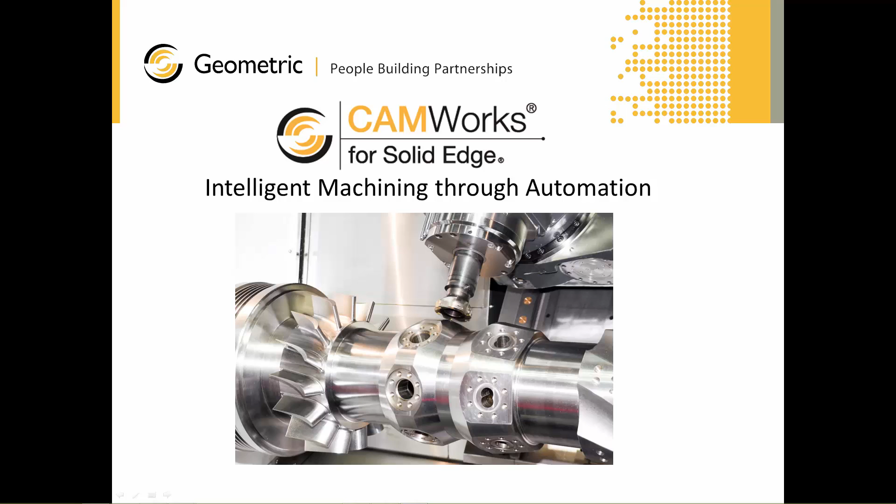We're here to talk about CamWorks for Solid Edge, so let's go ahead and get started. Geometric is the company behind CamWorks for Solid Edge. Geometric is a global company with offices all over the world. And in addition to CamWorks, we also market a number of other software products, including NestingWorks, DFM Pro, Glovius, and others. And in addition to the software products that we market, we're also one of the world's leading providers of software development and engineering services, as well as manufacturing engineering and automation services.

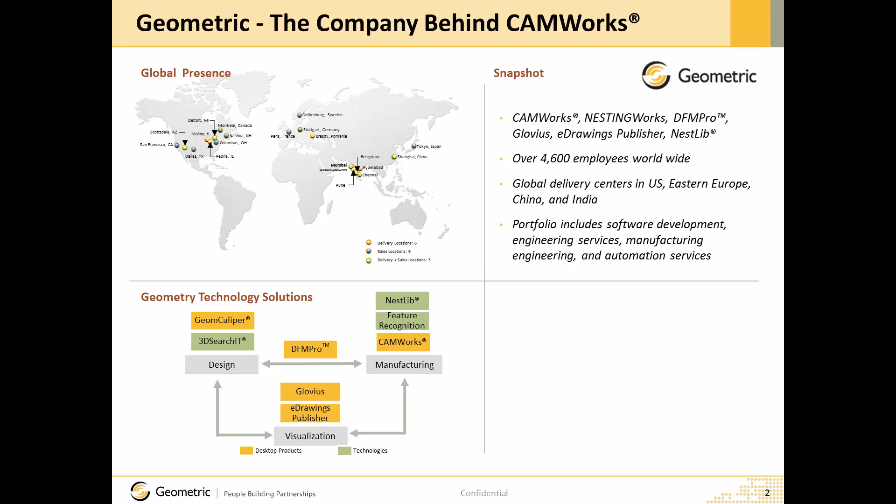CamWorks is part of the Geometric Technology Solutions, and in this diagram on the left you can see the software products that we market for design. In the center are the software products for visualization, and on the right are the software products for manufacturing, including the CamWorks product.

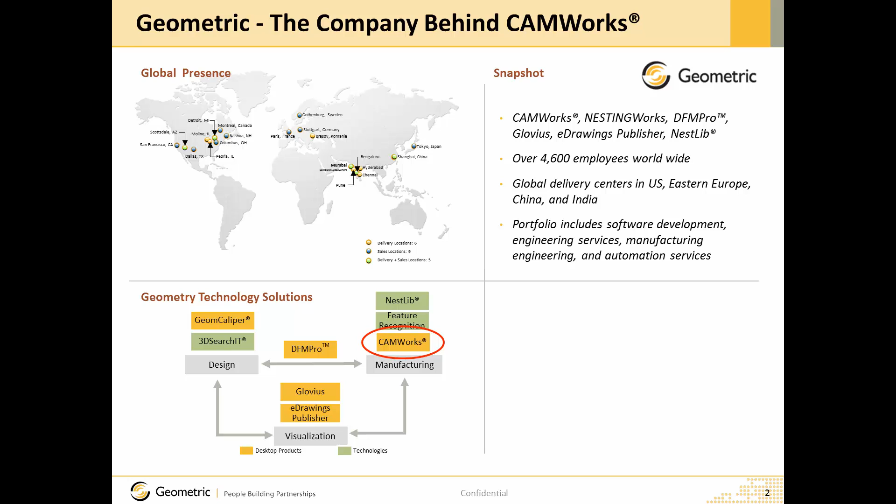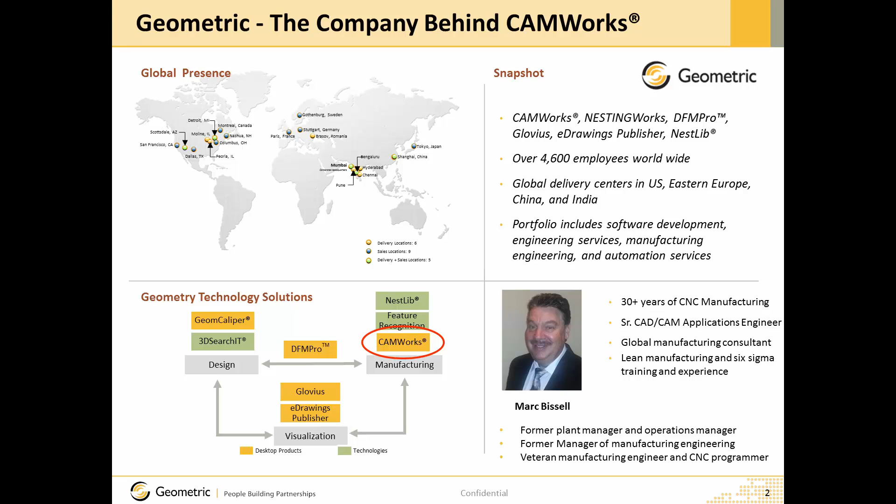So moving on, let's talk about why CamWorks. CamWorks for Solid Edge can help you reduce your programming time by up to 90%. The design and manufacturing models become one and the same, and we can help you to capture and reuse your best practices.

We can also help you cut your setup times in half. CamWorks Virtual Machine allows you to virtually prove out your CNC programs. It's a true G-code machine simulator with full collision detection, and it helps you avoid collisions and increase your program integrity.

CamWorks can also help you achieve faster cycle times and double your machine capacity. You can reduce cycle times by as much as 80% and increase your tool life by as much as 500%.

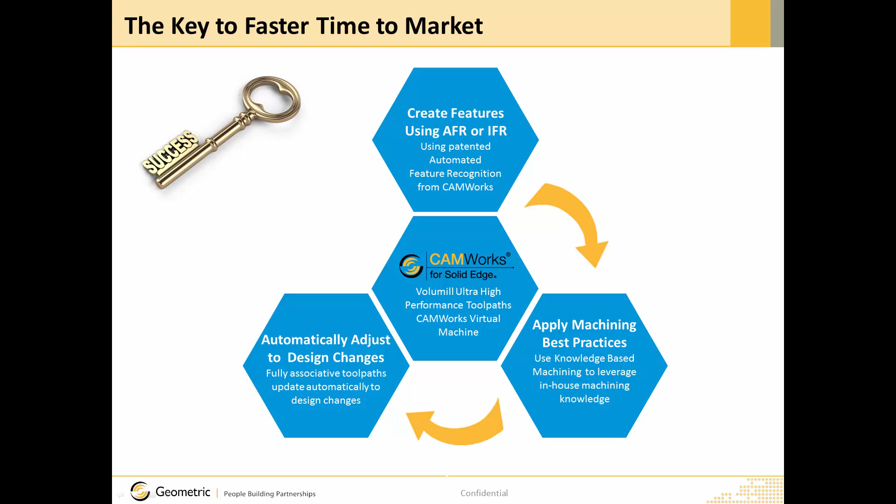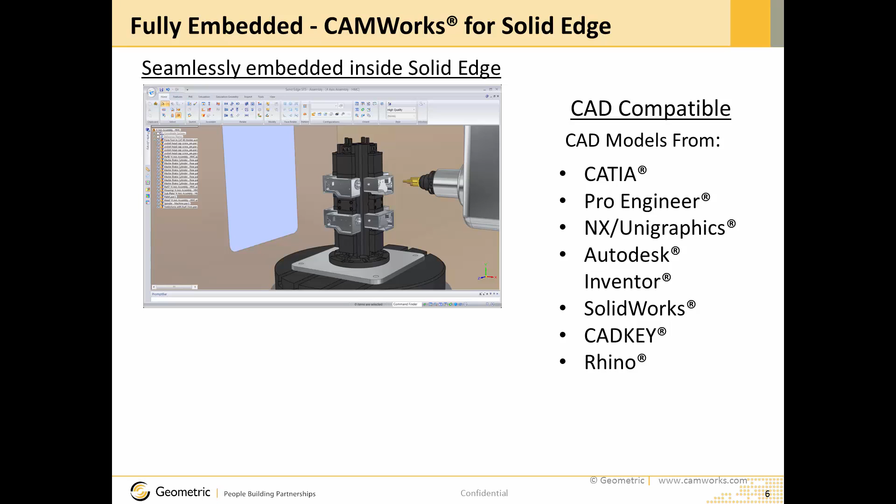CamWorks for Solid Edge is seamlessly embedded inside Solid Edge, so you never have to leave the familiar Solid Edge environment. CamWorks for Solid Edge works exactly the same with imported models as it does with native Solid Edge files, so it's also compatible with CAD files from a variety of other CAD systems. And it also supports industry standards like STEP, ACIS, Parasolids, IGES, and others.

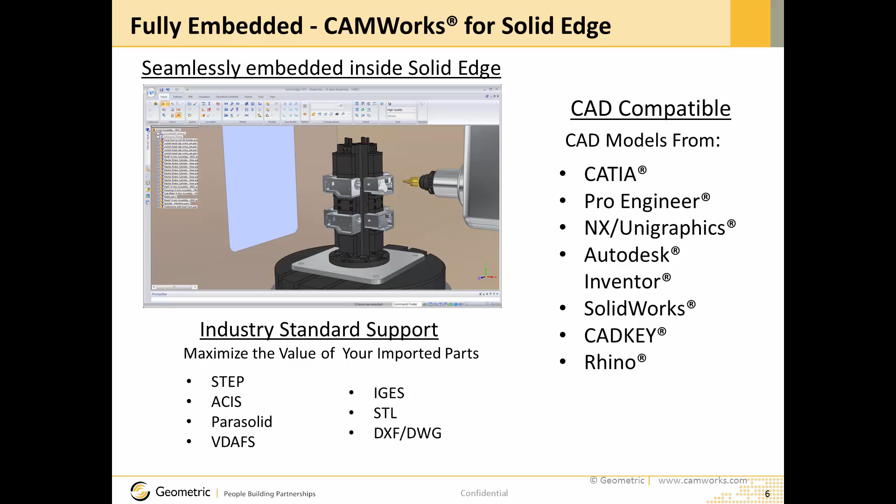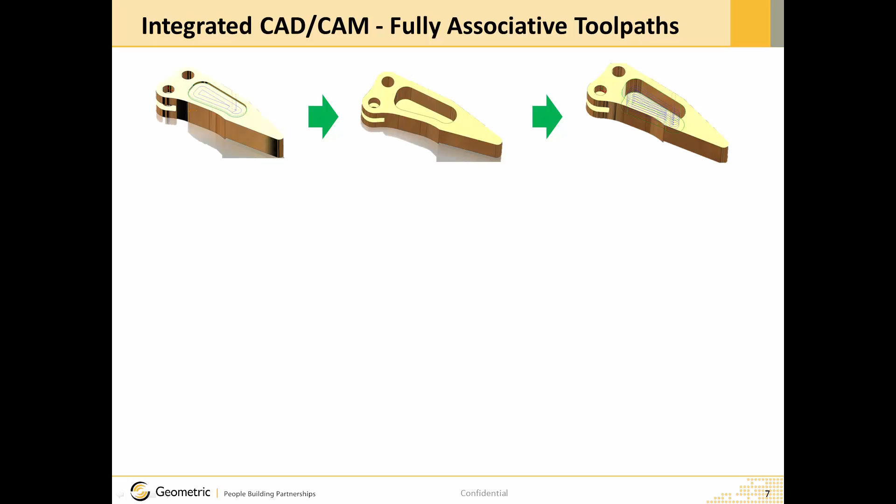CamWorks for Solid Edge is a fully integrated CAM system, and that's what makes it different than standalone CAM systems. The CAD and CAM model become one and the same, and all of the CAM data is stored directly inside the CAD file, in the case of Solid Edge, the .par or .asm files. There's no extra files to maintain, and no issue with geometry or translation errors.

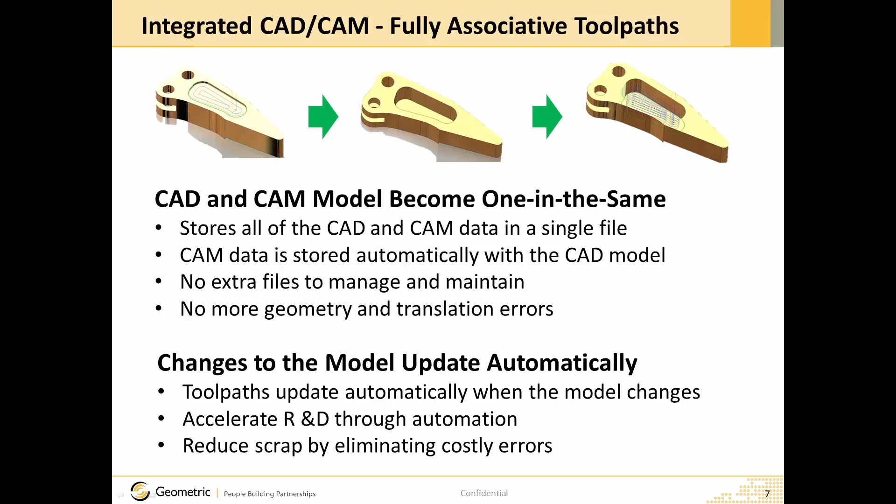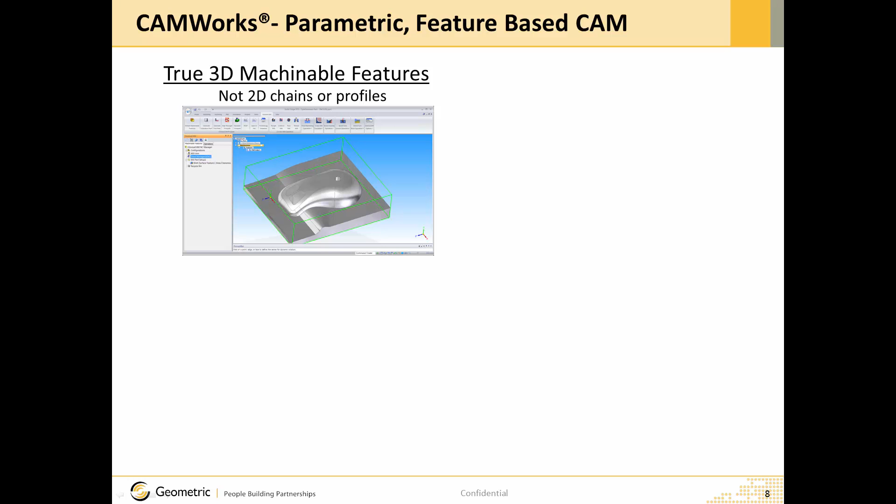And most importantly, toolpaths created using CAMWorks for Solid Edge will update automatically to the design changes. This accelerates the research and development process and also reduces scrap by making sure that you're always machining the current revision of the part. CamWorks for Solid Edge is a parametric feature-based CAM system. It uses true 3D machinable features, not 2D chains and profiles like obsolete standalone CAM systems.

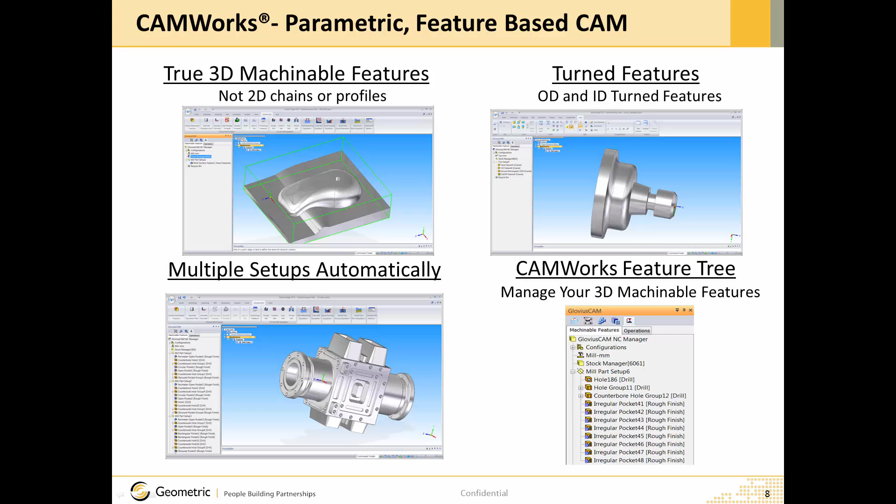And it can automatically recognize turned features as well, including ID and OD turned features. CamWorks for Solid Edge also has a feature tree to manage your machinable features. And it will also create multiple setups automatically for parts that require machining on multiple sides.

Now let's talk about automatic feature recognition, or AFR. Automatic feature recognition will automatically recognize over 20 different types of machinable features, not just holes, but also slots, pockets, bosses, and other types of machinable features. It'll create fully associative machinable features, so if the model changes, the toolpaths will update automatically.

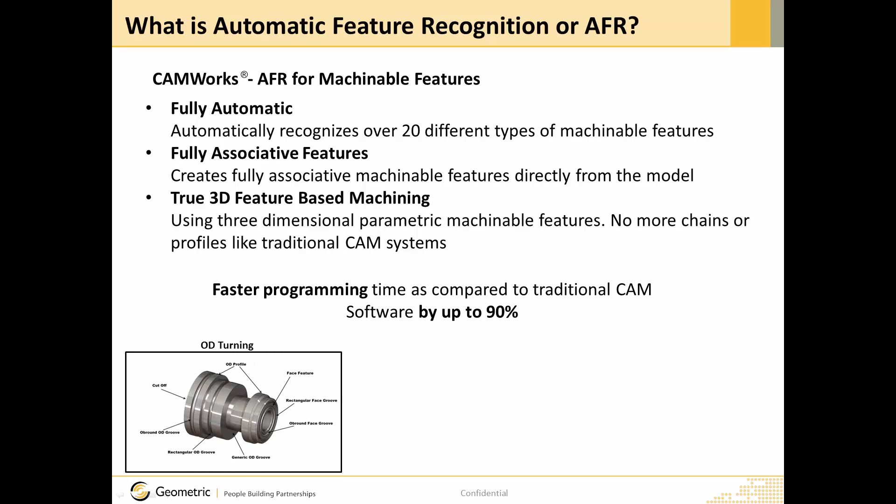And it uses true 3D feature-based machining. The end result is faster programming as compared to traditional CAM systems by up to 90%. CamWorks for Solid Edge will automatically recognize OD turning features, ID turning features, and a variety of prismatic milling features.

CamWorks for Solid Edge also uses the world's most advanced knowledge-based machining. This is true knowledge-based machining. It's not just an add-on, but it's the way CamWorks works. It allows you to be able to capture and reuse your best practices, and it's fully customizable so it can become an expert database for your own company. And it eliminates repetition and promotes standardization.

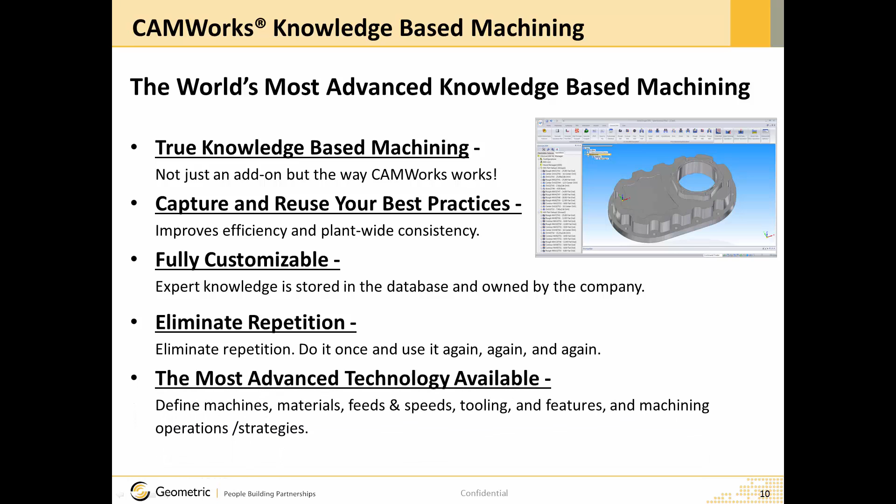And this is some of the most advanced technology that's available. Now let's take a look at a live demonstration of CamWorks for Solid Edge. Let's begin by taking a look at this aluminum plate.

Once CamWorks for Solid Edge is installed, a CamWorks ribbon menu is added to the Solid Edge interface. In addition, 3 tabs are added to the command bar, one for the CamWorks features, one for CamWorks operations, and one for the tools in CamWorks. Notice that I already have some tools defined, and you can predefine a tool crib with the standard tools that you'd use on each machine.

Now let's begin programming the part by using automatic feature recognition to automatically recognize the machinable features on the part. You can see how quickly CamWorks for Solid Edge was able to automatically recognize all the machinable features on this part. It created a part perimeter feature to mill around the outside of the part, a face feature to face the part off. The next feature is a hole at the center of the part, which happens to be a different size than the rest of the holes in the part.

Next, we have a hole group, and you notice that all the small holes have been grouped together automatically in order to create this hole group, so that I don't have to go around and select each and every hole in the group. Next, we have the group of counterbore holes, and then you can see a feature has been created for each of the irregular pockets around the part.

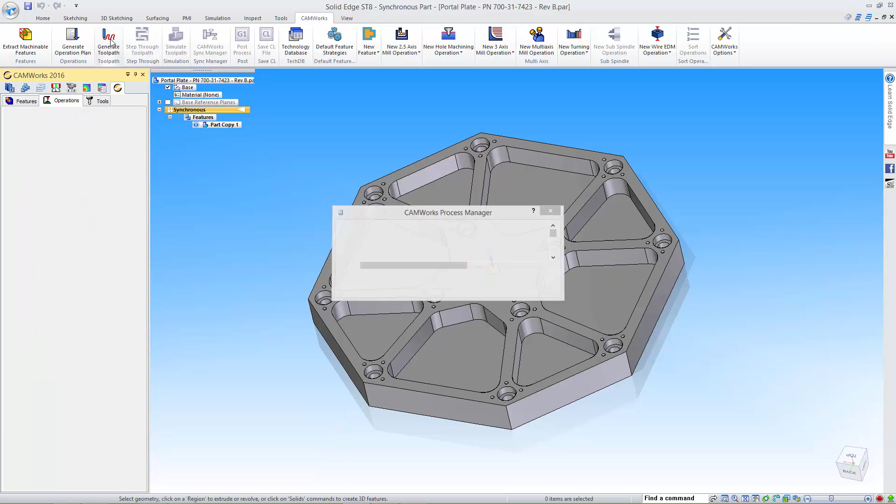The sequence of machining is always important, and what I can do is use the drag and drop capabilities of CamWorks in order to establish a particular sequence. So for example, if I wanted to face the part off first, I can drag and drop that operation to the beginning of the operations tree.

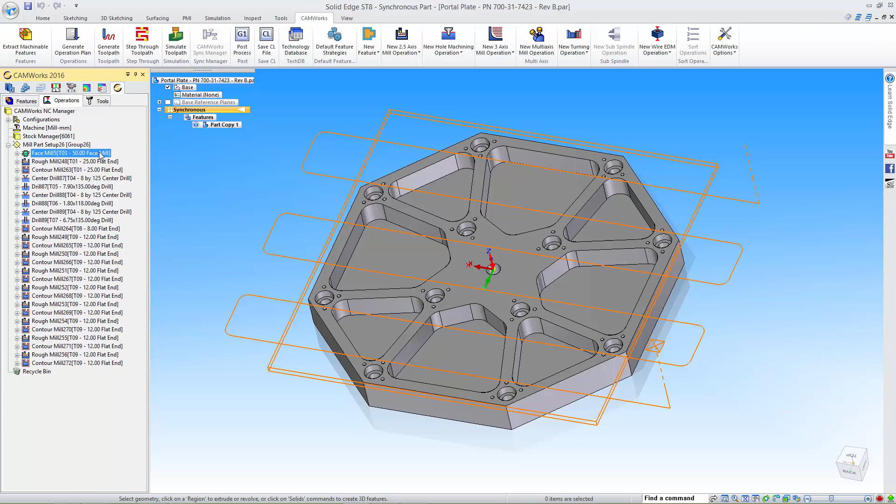In addition to the ability to drag and drop the operations into a particular order, CamWorks for Solid Edge also includes the ability to sort operations. I'll open up the Sort Operations dialog box and click on the Sort tab. Next, I'll drag the rough milling and the finish milling prior to the center drilling and drilling. So this will establish a new sequence for machining. These sequences can also be stored and reused.

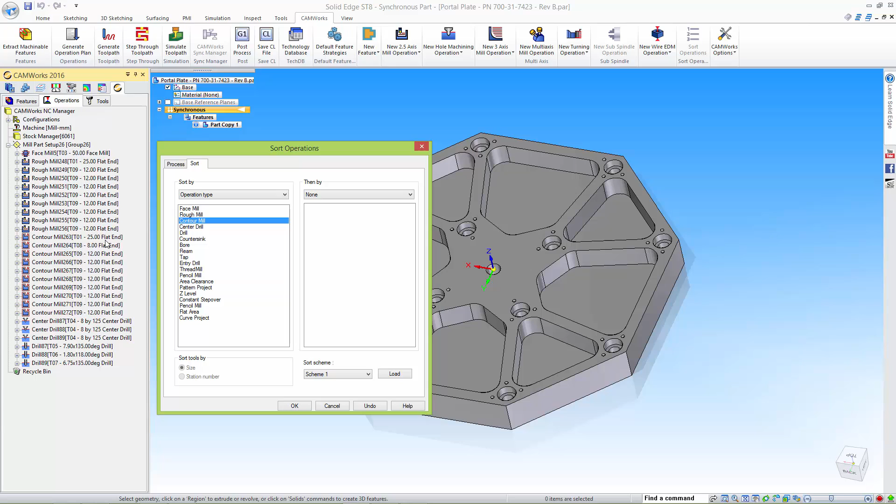Once I hit the OK button, all the operations are sorted into that order, so that we get the rough milling, then the finish milling, then the center drilling and drilling. Now that all the operations have been sorted and are in the sequence that I want, I can go ahead and simulate the machining process.

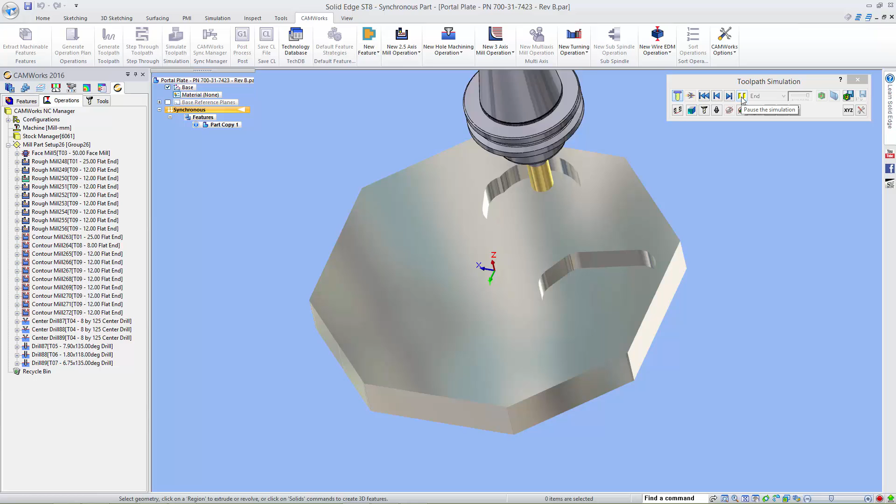Here you can see the actual machining process occurring. I can stop it, I can single step through it, I can slow it down, and there's many other options up in the Toolpath Simulation toolbar. Let's go ahead and continue the simulation and watch the machining process take place.

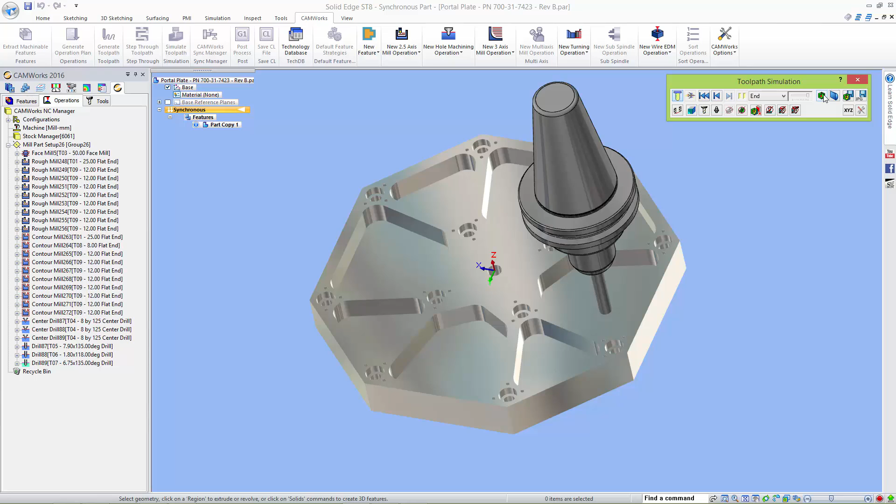Once the simulation is complete, I can compare the machined model to the original design model. And you can see here everything is in green, which means that the part has been machined exactly as it was designed. If there was any remaining stock, it would be in blue, and we can see some of that on the bottom of the part. And if there's any gouges, it would be in red.

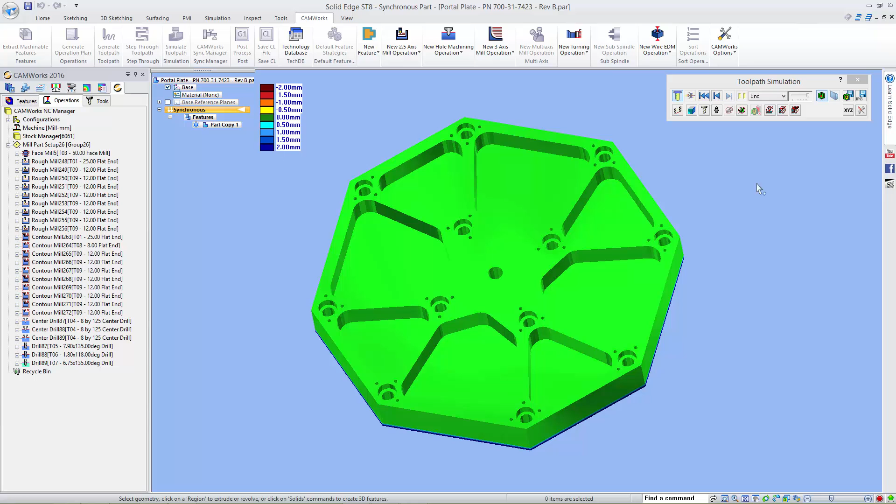Now that I'm happy with my program, I can go ahead and generate G-code. I'll go ahead and select the G-code icon and then give the program a name. I can then go ahead and step through the G-code or just hit play, and we can see the G-code being generated to machine this part.

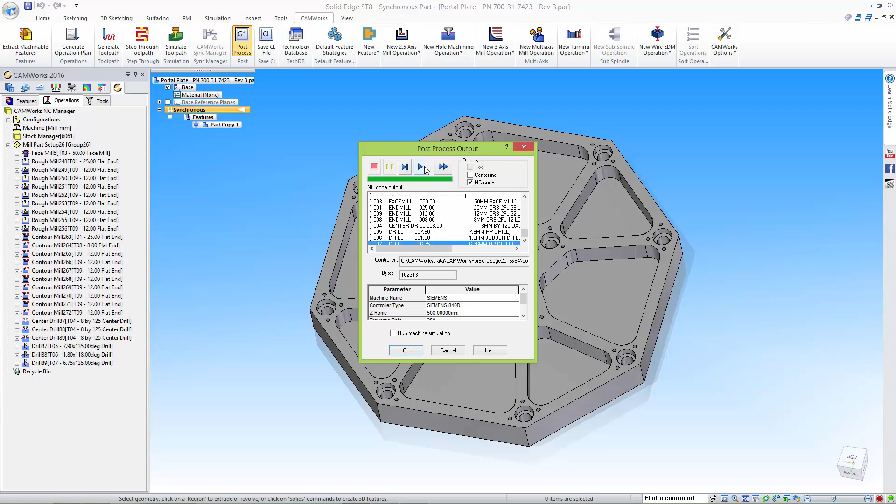So we've been able to program this part in a little under 6 minutes. Let's go ahead and take a look now at how easily we can make changes and how the toolpaths will update automatically. Let me go to a top view of the part, and then let's use Solid Edge's synchronous capabilities to make a change to the part.

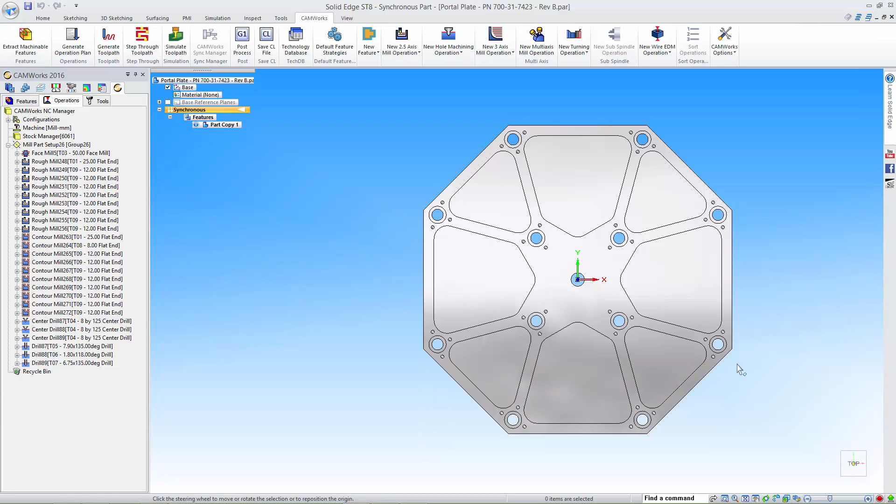I'll draw a window around these features, and then I'll go ahead and offset them. And then let's just type in a value here of, say, 15 millimeters. Notice how dramatically the part's changed. When we go back to CAMWorks, as soon as we touch one of these tabs, we get a message. CAMWorks knows that the part's been changed, and it's asking us if we want to rebuild it.

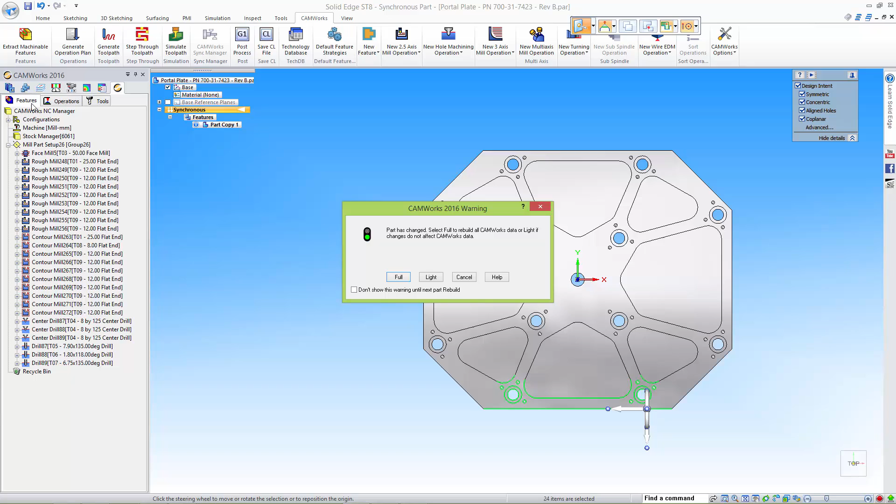The light rebuild here is if we made a change that didn't affect the toolpaths and we didn't want to wait for all the toolpaths to be rebuilt. Obviously, in this case, we've made a change that dramatically affects the toolpaths, so we need to do a full rebuild. CAMWorks will now automatically regenerate the toolpaths in order to machine the new revised part.

Now that the features and operations have been rebuilt, we can now simulate the toolpaths and watch the revised part being machined. So you can see the advantages of the design model and the manufacturing model becoming one and the same. The result is the CamWorks for Solid Edge toolpaths update automatically to the design changes. This ensures the current revision of the part is always the one being machined.

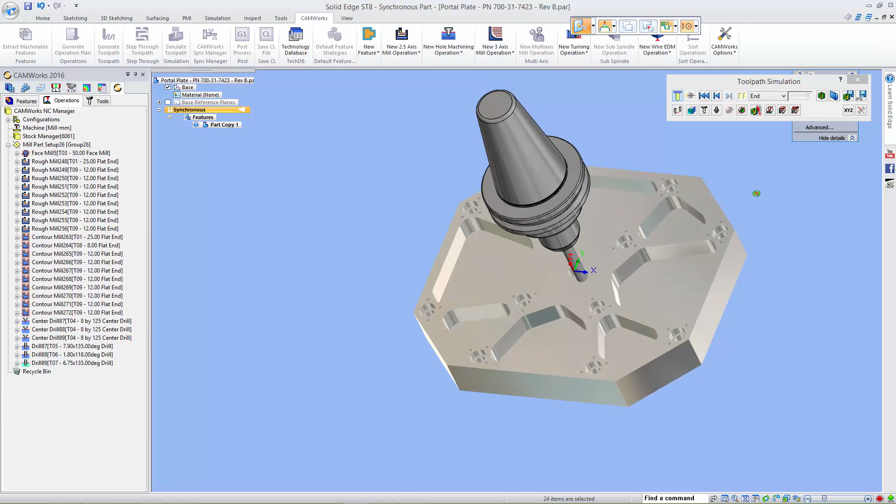Now that we've seen CamWorks in action, let's take a closer look at how CamWorks works. Let's start at the top of the operations tree with the CamWorks NC Manager. Here we can see some details about the program, including how much time it will take to machine this part.

Next, going down the list, you can see the configurations. Each CamWorks for Solid Edge file can have multiple configurations and can be used, for example, to have different programs for different machines, all stored under one Solid Edge part file. Moving down the list, we'll go to the machine, and in the machine node is where we can select the machine that we want to program. This could be a list of the machines in your company. For this example, I'll select the Haas VF4.

There's also the ability to set up a tool crib for each machine, which would be a standard set of tools that you might use on that machine. We'll also have the ability to select the post processor and a posting tab to put in some information that might appear at the top of the program. This is a user configurable area. We'll also have the setup tab and the rotary and tilt tabs, which are typically used to set up 4 and 5 axis machines.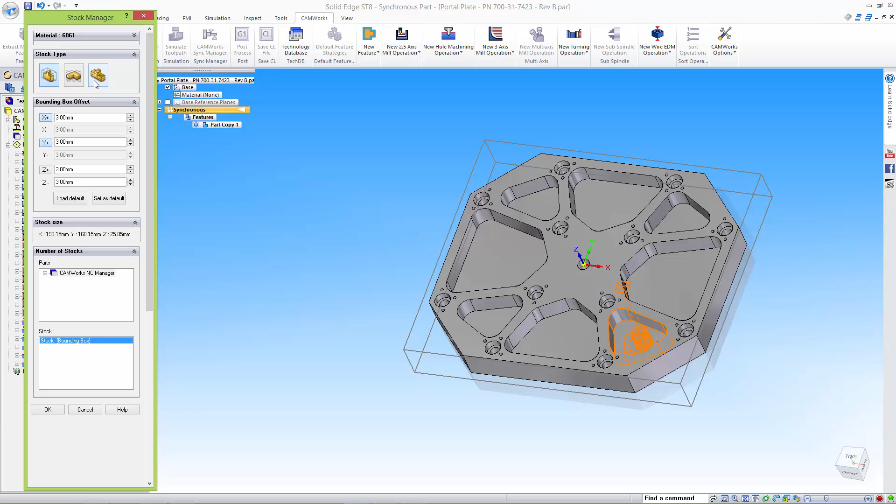Next on the list is the mill part setup. This is the setup for the machine. Here I can specify where I want the part program 0. By default, CAMWorks puts the part program 0 at the center top of the stock, but I can also change that to a different stock vertex if I want to do that. For example, I could pick the upper left corner for the part program 0 and then say OK.

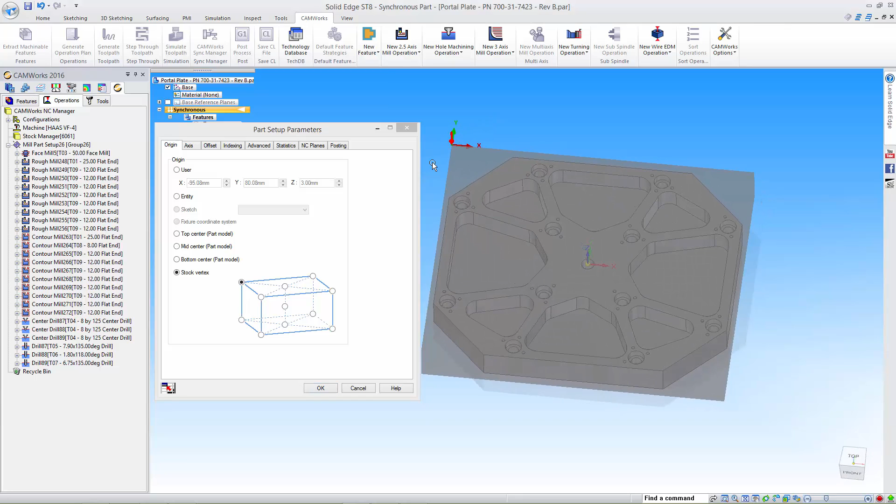CAMWorks knows that the part program 0 is changed, and it asks if we want to regenerate the program from that new part program 0. I'll say yes, and all the toolpaths will be regenerated automatically. Under the setup are each of the operations. And let's just take a look at one of the operations, for example, the roughing of this pocket.

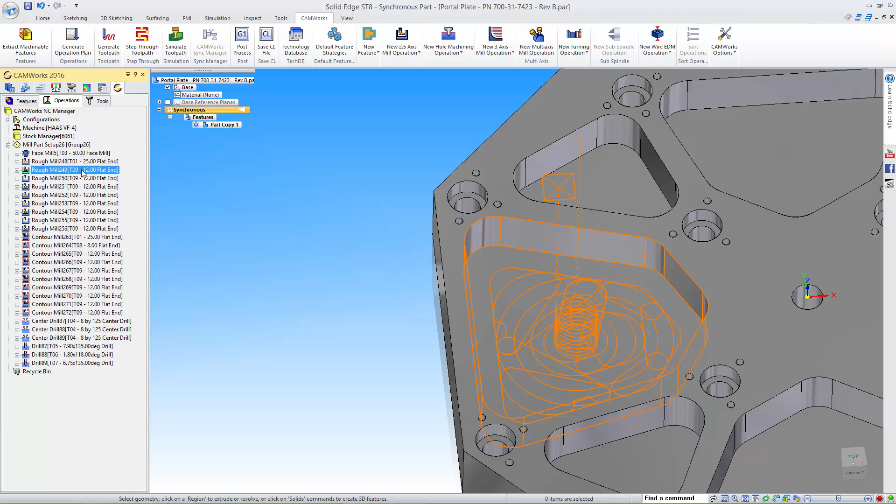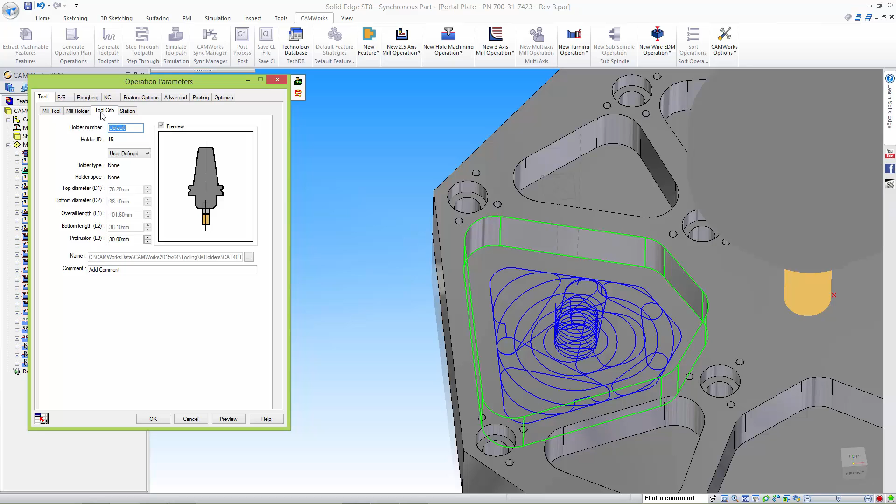If I double click on the operation, it'll open, and all the information regarding the roughing of this pocket is stored within this one dialog box. Here we have the tool, and I can change the parameters on the cutting tool itself, the tool holder, the tool crib that we saw previously, and if I want to use a different tool to machine this pocket, I can simply select it from this list, and also the station number for what tool number is being used.

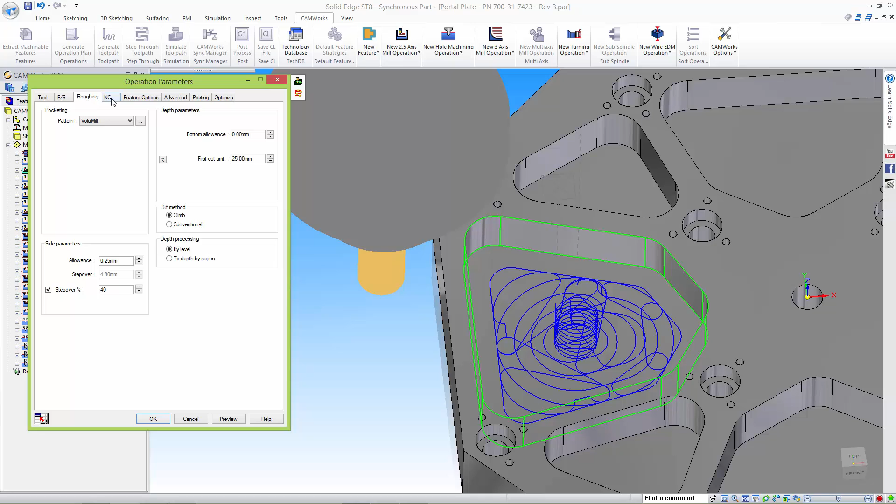In addition, there's also the feed and speed, and the parameters regarding the roughing of this operation. We have the NC tab to set up the rapid plane, and then some other tabs regarding more advanced functions.

Using CAMWorks for Solid Edge, the user can decide exactly what strategy, tools, feeds, and speeds they want to use in order to machine a particular feature. Once they've decided on the strategy, they can store this strategy in the technology database, and it can be reused automatically by CAMWorks the next time a similar feature is found on a part. The end result is parts can be programmed much faster using CAMWorks for Solid Edge than with standalone CAM systems.

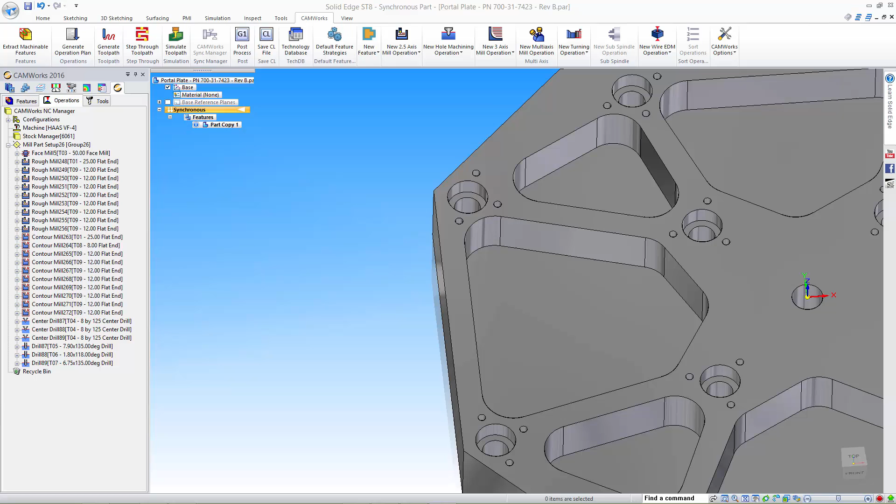So now let's take a look at another part and see how efficiently CAMWorks for Solid Edge can be used to program the part. I'll switch windows and go over to this other part.

Let's go to the CAMWorks ribbon bar, and we'll start by extracting the machinable features on this part. Now that all the features have been recognized, we can go ahead and generate the operation plans using knowledge-based machining.

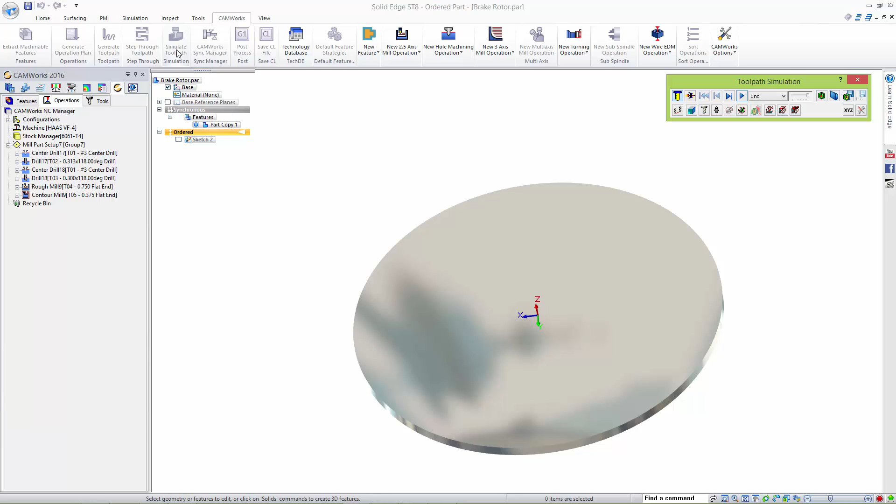Now that all the operations have been generated, let's go ahead and generate the toolpaths. And now we can simulate the machining of this part. Notice how in this example I've used a pre-cut blank for the machining. I'll go ahead and simulate the process, and now we can watch the machining process taking place.

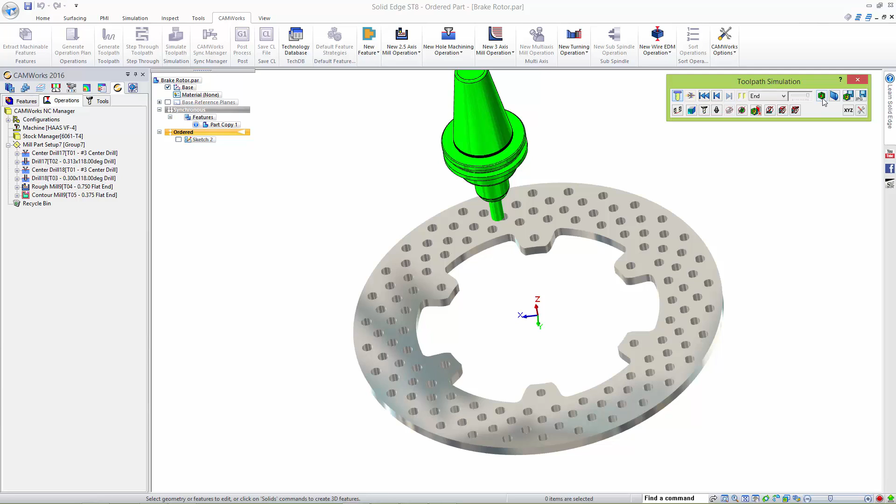So you can see how quickly I was able to generate toolpaths to machine this part. And again, if I compare the machined model to the design model, we can see everything is in green, so the part has been machined correctly.

Now I'll go ahead and generate G-code, give the file a name, and then create the G-code required for the machining of the part.

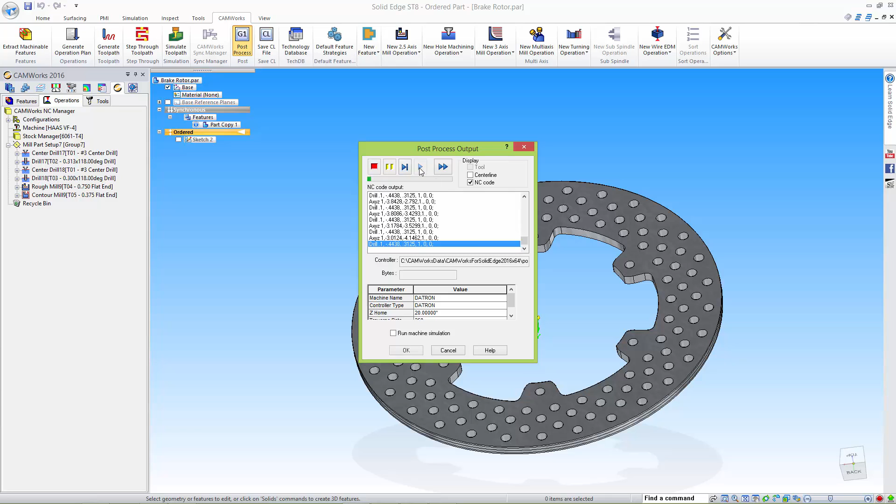So I hope you're getting an idea of how quickly parts can be programmed using CAMWorks for Solid Edge. Next, I'd like to look at a multiple part assembly. I'll switch windows, and let's take a look at this tombstone fixture with multiple parts mounted on it.

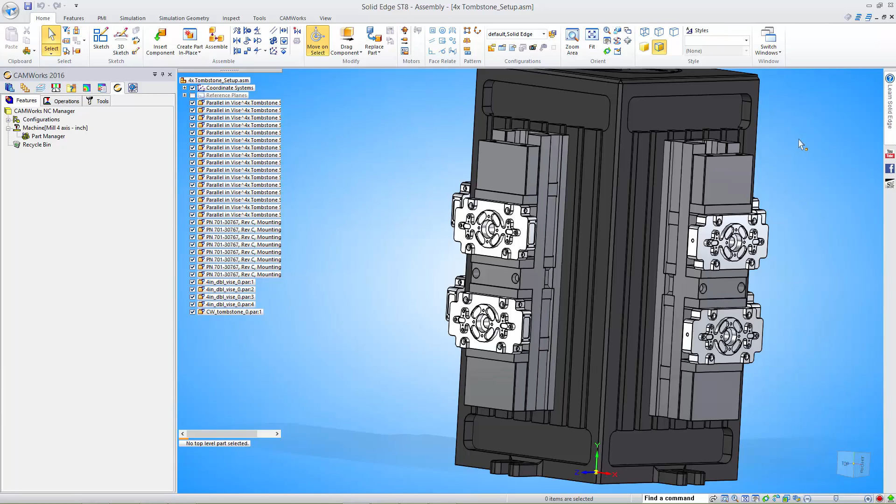In addition to being able to machine individual parts using CAMWorks for Solid Edge, we can also use it to machine assemblies and parts in assemblies.

So here, let's begin by opening up the Part Manager. The Part Manager lets us select which part in the assembly needs to be machined. So I select one of the parts that I want to machine, and then I can go ahead and add all the instances of the part rather than having to go around and pick them all. Now all the instances of the part have been added to the CAMWorks Part Manager.

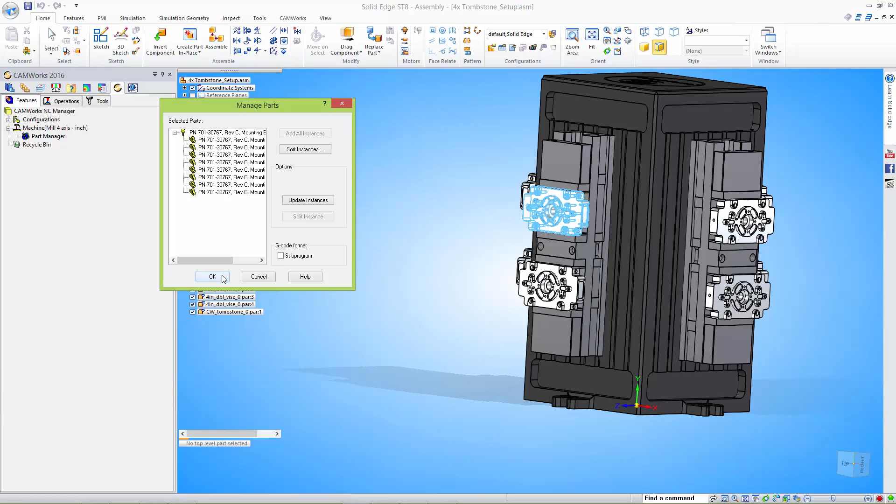I can then go ahead and use CAMWorks Automatic Feature Recognition, as we have previously, to recognize all the machinable features on the parts. All the features have been recognized, so now I can go ahead and generate the operations for machining.

And this takes just a minute because there's a lot more operations to be generated here. Now all the operations have been generated. I can create the toolpaths, and all the toolpaths for the machining of all the parts will be generated automatically.

Okay, now that we have all the toolpaths and operations complete, what we can also do is sort these. And this time, what we want to do is a little more complex sorting. So I'll go ahead and select to sort the operations, as I did before, but this time we'll say by and across setups. What this will do is minimize the number of tool changes and indexes for the machining of the part.

Again, I'll go to the Sort tab, and in a similar way I'll do all the rough milling and all the finish milling prior to the center drilling and drilling. Up here I'll also specify that I want to sort by tool, so one tool will be used across all the parts to minimize the number of tool changes.

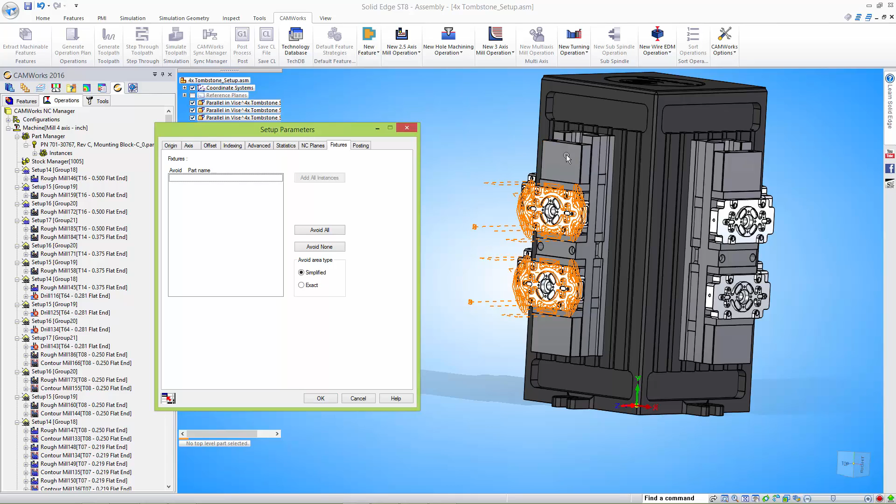Next, what I'll do is specify the fixtures that I want in my simulation. To do this, I'll edit one of the setups and add the fixtures. I'll click on one of the fixtures, and add all the instances of that fixture. In addition, I'll also add the tombstone as a fixture as well. Now, when I perform toolpath simulation, we'll be able to not only see the fixtures, but also perform collision detection against those fixtures.

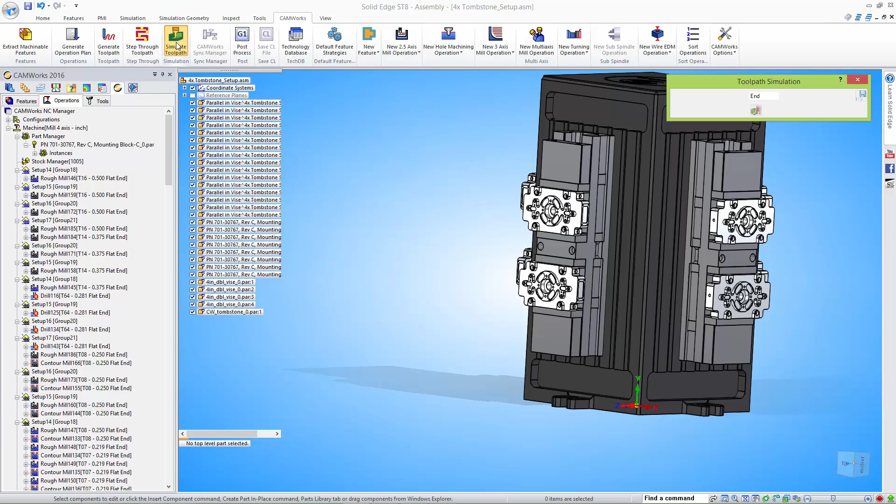So let's go ahead and simulate the machining process. Notice how it's using one tool on all the parts, and then it does the indexing. We can see a nice toolpath simulation of exactly what's going to happen on the machine.

Notice how fast we were able to program this entire set of parts on a tombstone fixture using CAMWorks for Solid Edge. CAMWorks for Solid Edge is an excellent product for doing production machining of this type. Notice how it's also minimizing the number of indexes as well as the number of tool changes. And these are quite complicated parts with lots of features and lots of machining on multiple sides of the part.

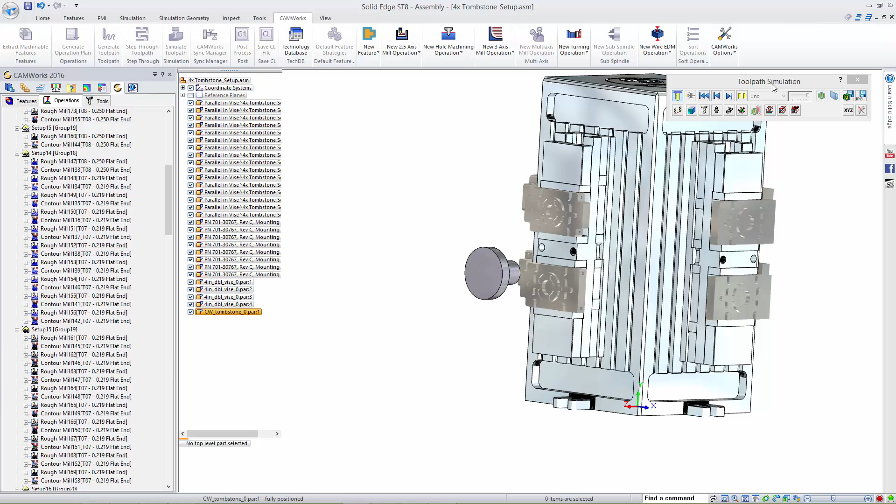We'll let it finish up the simulation. And again, the user can decide exactly what machining strategies they want to use in order to create the best program.

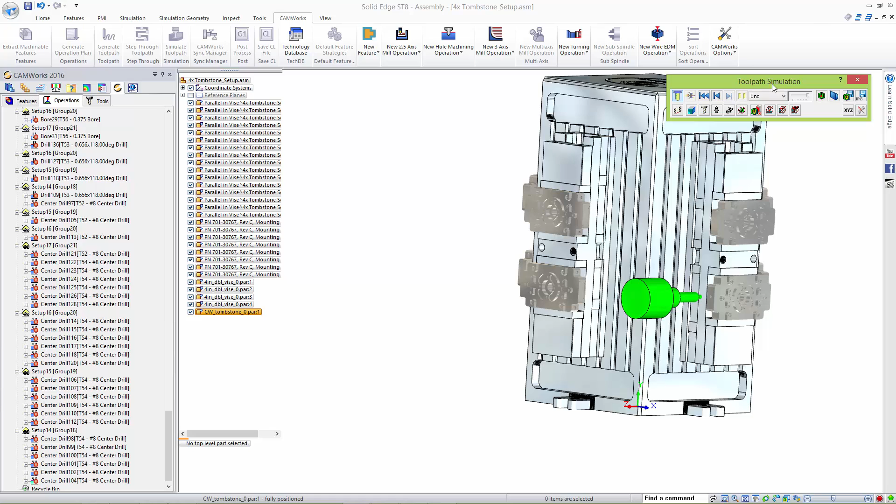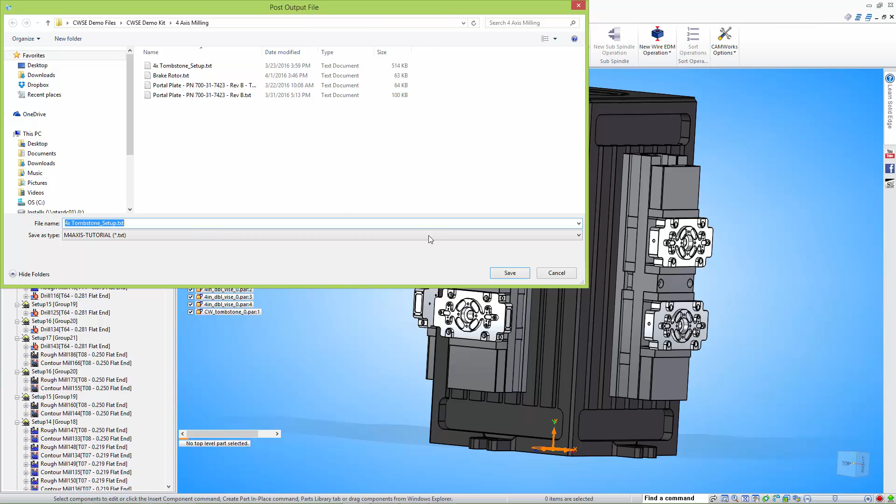Next, I'd like to show you a great optional product for CAMWorks for Solid Edge, and that's our CAMWorks Virtual Machine, which provides true G-code machine simulation. It's integrated right inside CAMWorks for Solid Edge. In order to simulate the G-code, we first must post the file. So I'll go ahead and post-process the file. And here I have it set so that it'll run machine simulation once the file is generated.

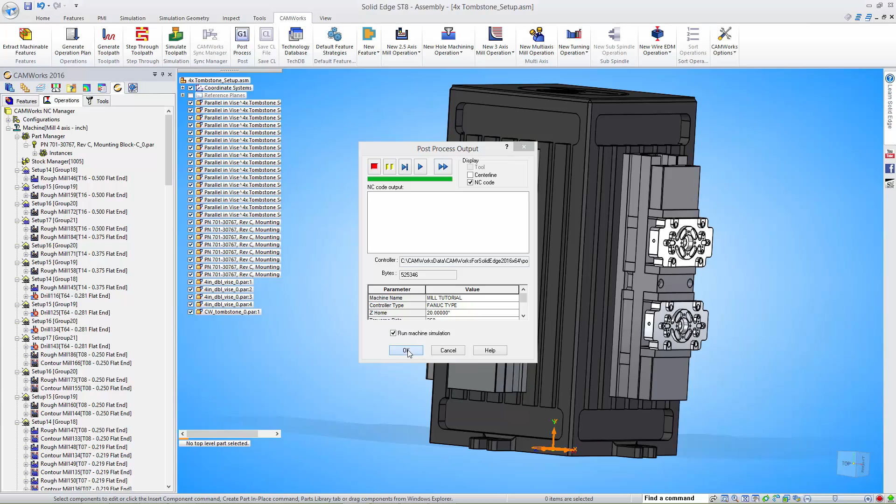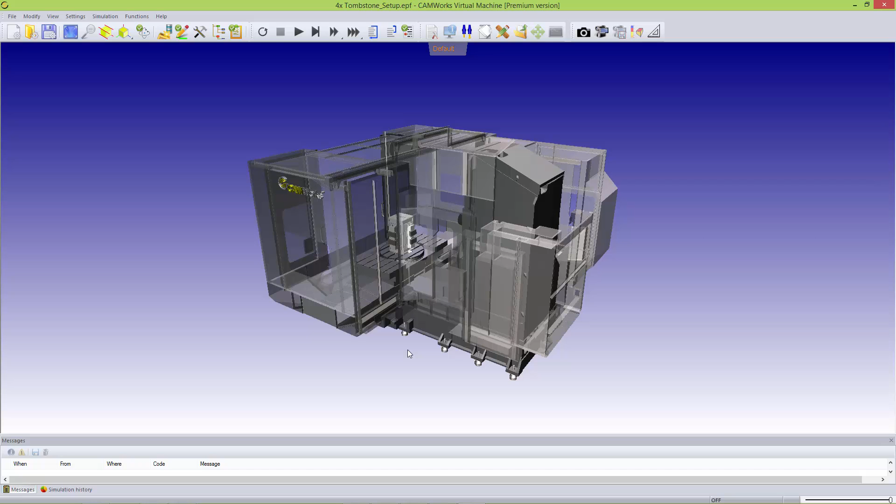Let's go ahead and fast forward it so the G-code gets created quickly. And it's finished, so let's say OK now. The integrated CAMWorks virtual machine will open up a new window for us with the tools, fixtures, machine, part, stock, all ready to go. So you can see now it's loaded the tools, fixtures, stock onto the machine.

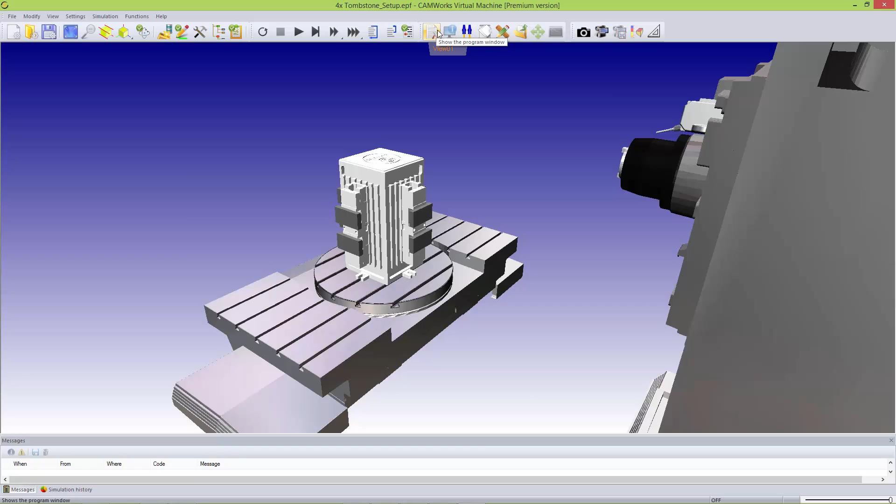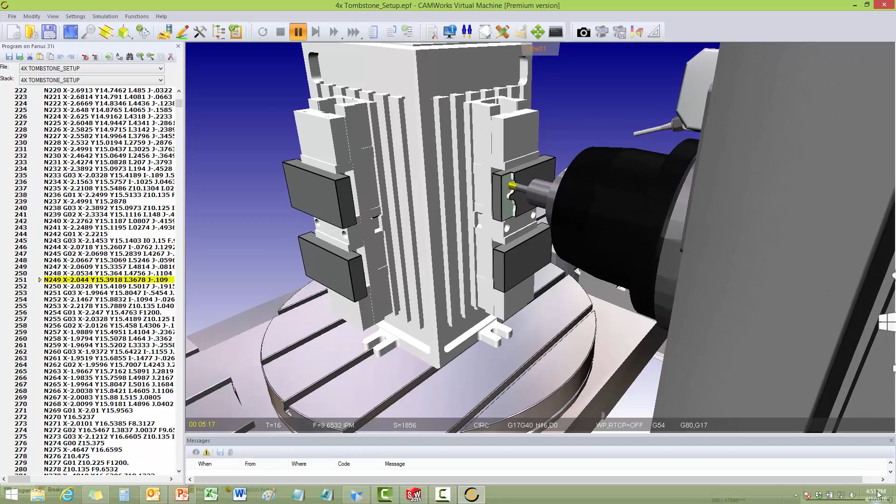We change the view so that we can turn off the outside of the machine. Let me also turn on the window that includes the G-code. And then go ahead and start performing the simulation. You can see here now that CAMWorks Virtual Machine is running through the G-code and performing true G-code machine simulation for us. And if any collisions occur, they'll be detected automatically. So this is a way that you can virtually prove out your programs before going to the machine tool, thereby greatly reducing setup time.

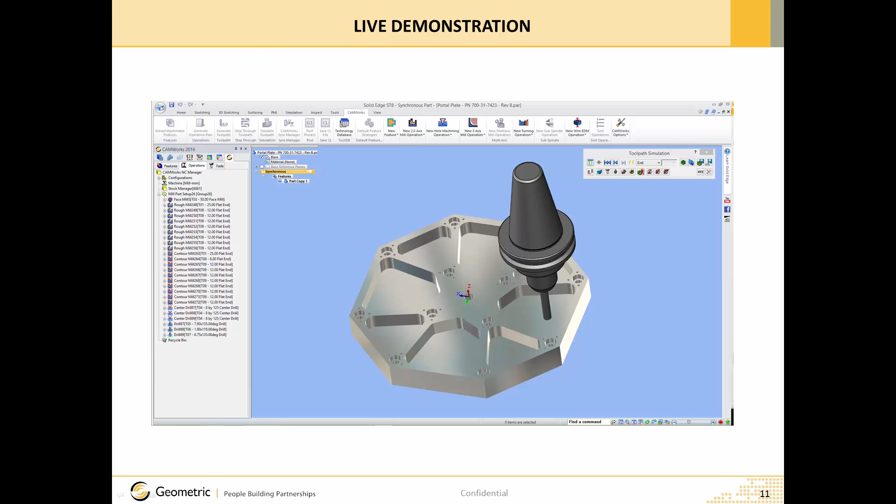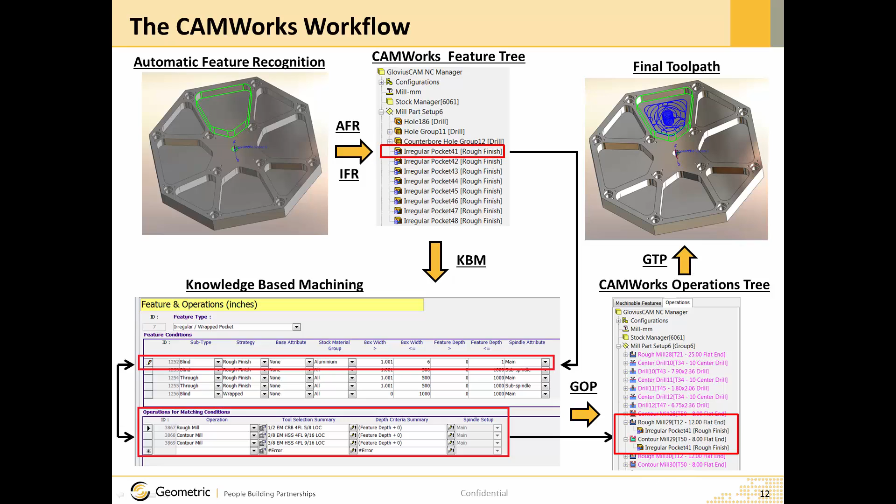Next, I'd like to talk about high-performance toolpaths or high-speed machining. CAMWorks includes some high-speed machining cycles, including adaptive machining cycles like spiral roughing. CAMWorks also includes previously removed material tracking for rest machining. It also includes smooth and continuous linking, and this helps improve surface finishes. In addition to the high-speed machining cycles that come with CAMWorks, there's also CAMWorks VoluMill, which is an ultra-high performance toolpath generator.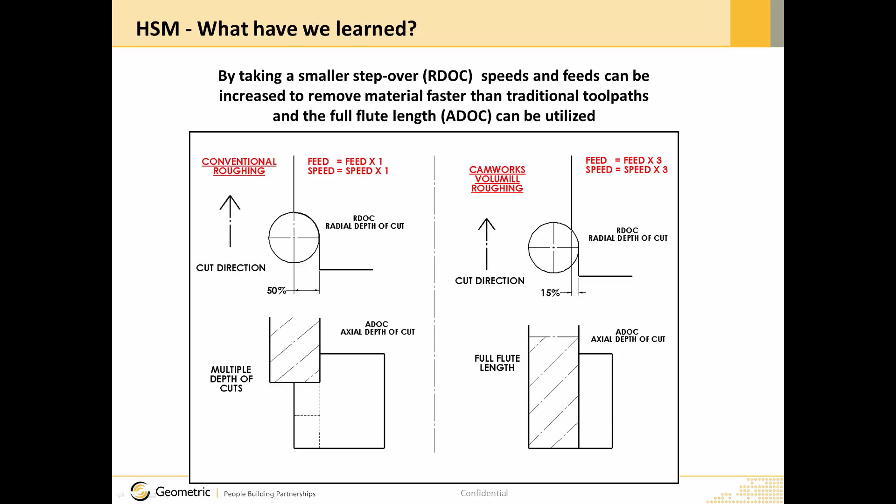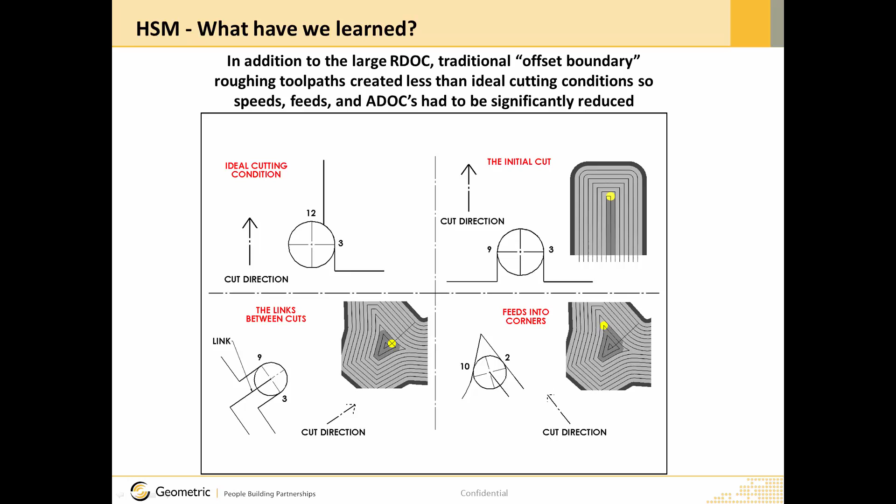However, typically CAM systems used an offset boundary type toolpath for rough milling. Unfortunately, this meant during the initial cut a full 180 degrees of the cutter was being used. The same was true with the links between cuts and when cutting acute angles in corners. Therefore, due to the increased cutter loads caused by these traditional toolpaths, the feeds and speeds and depth of cuts had to be reduced for the entire roughing process, or the cutter simply wouldn't survive.

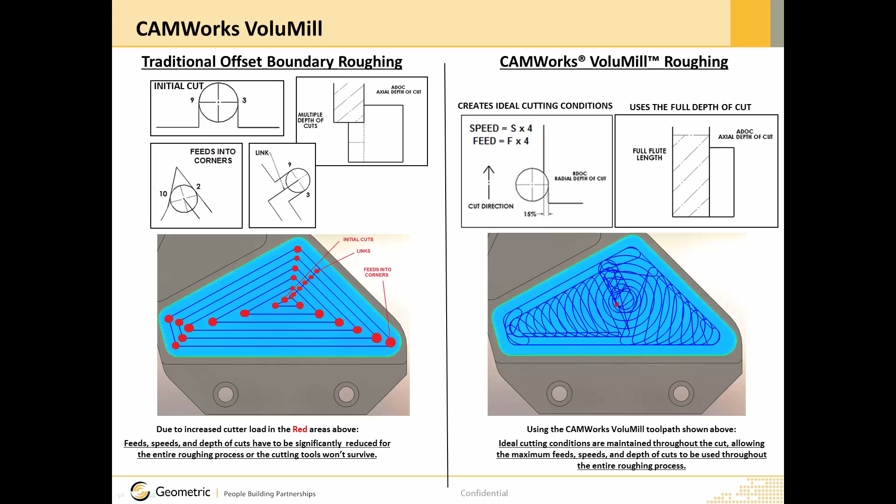But using the CamWorks VoluMill toolpaths, ideal cutting conditions are maintained throughout the entire roughing process. This means a 4 times increase in feeds and speeds can be used, and an axial depth of cut to the full flute length of the cutter if required.

So now let's look at an actual case study using CamWorks VoluMill. A firearms manufacturer was machining titanium using a half-inch 5-flute end mill. Before VoluMill, they were cutting the parts at a little over 1200 RPM and 6 inches a minute. The cycle time was 80 minutes per part, and they were getting 4 parts per tool.

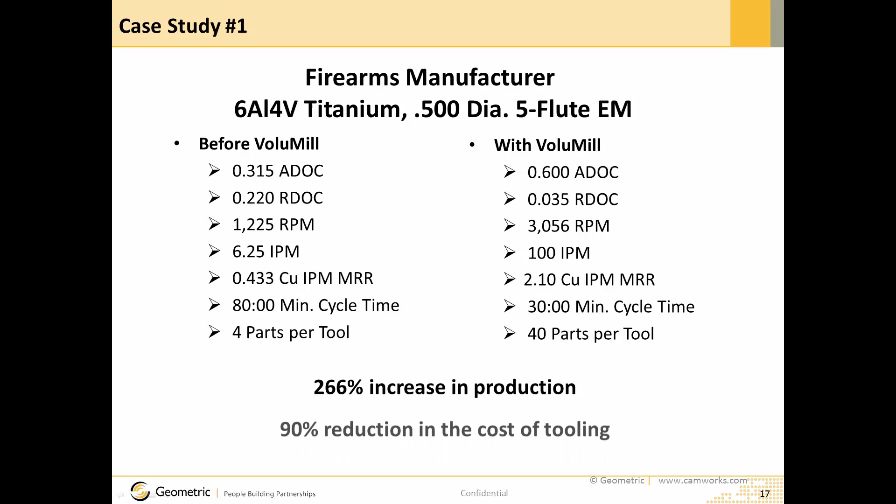Using VoluMill, they were able to nearly double their axial depth of cut to 0.600 and machine the part at over 3000 RPM and 100 inches a minute. The cycle time dropped to 30 minutes, and at the same time the tool life was increased by 10 times. The end result was a 266% increase in production and a 90% reduction in tooling costs.

In the next case study, a half-inch 4-flute end mill was being used to machine 1018 steel. Before VoluMill, the part was machined at the cutting tool manufacturer's recommended speeds and feeds of 3200 RPM and 40 inches a minute. The cycle time was 21 minutes, and the tool life was 4 parts per tool.

Using VoluMill, the depth of cut was nearly tripled, and the part was machined at 9000 RPM and 360 inches a minute. That's nearly a 3-fold increase in speed and a 9 times increase in feed. The result was an 80% reduction in cycle time, a 400% increase in production, and a 70% increase in tool life.

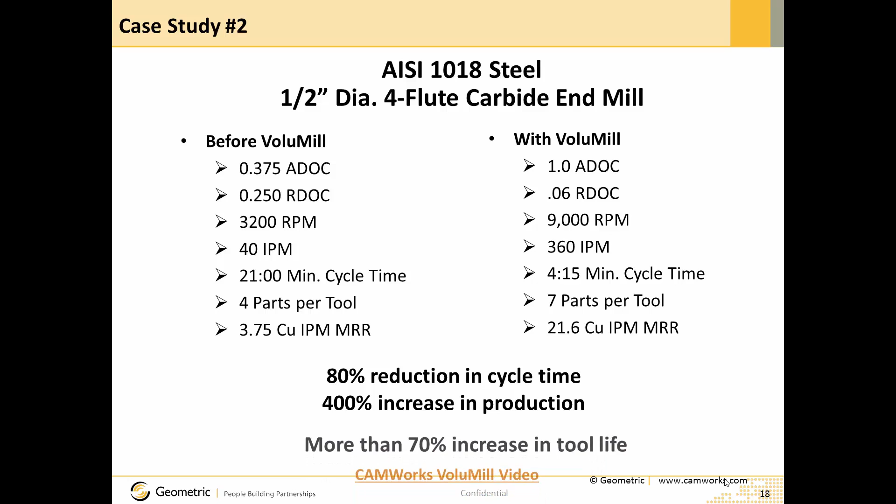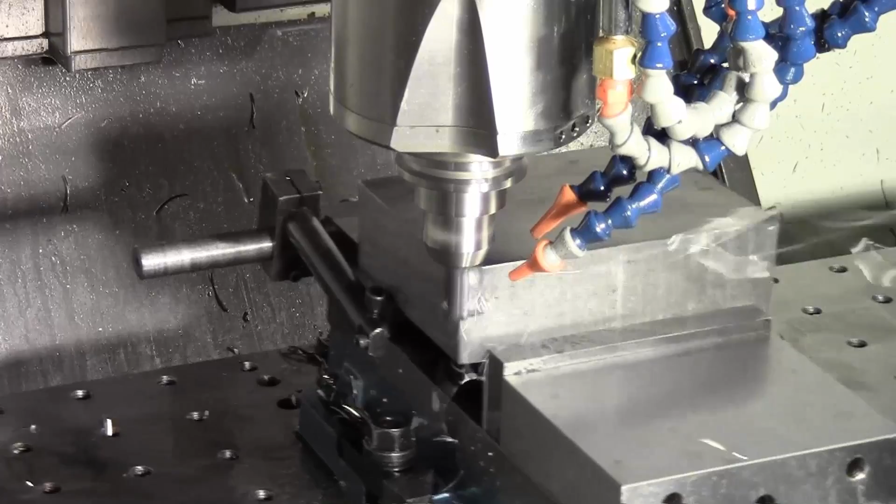Here's a video of the part being machined. Watch as a half-inch end mill is used to cut 1 inch deep in 1018 steel at 9000 RPM and 360 inches a minute. This is nearly 3 times the recommended speed and 9 times the recommended feed rate, dry, without cooling, using only compressed air to remove the chips.

CamWorks is available in a variety of machining modules to enable you to purchase only what you need. The milling modules begin with 2.5 axis. A 3-axis module is available, as well as a 4 and 5-axis module. And each of these modules include the previous modules. So for example, if you purchase a 4-axis module, it will include the 2.5 and 3-axis modules.

For turning, there's a 2-axis and a 4-axis module available. And for mill turn, there's a 2.5, 3-axis, 4-axis, and a 5-axis module available. For wire EDM, there's a 2 and a 4-axis module available. Then we also have CamWorks Virtual Machine and CamWorks VoluMill that we looked at earlier.

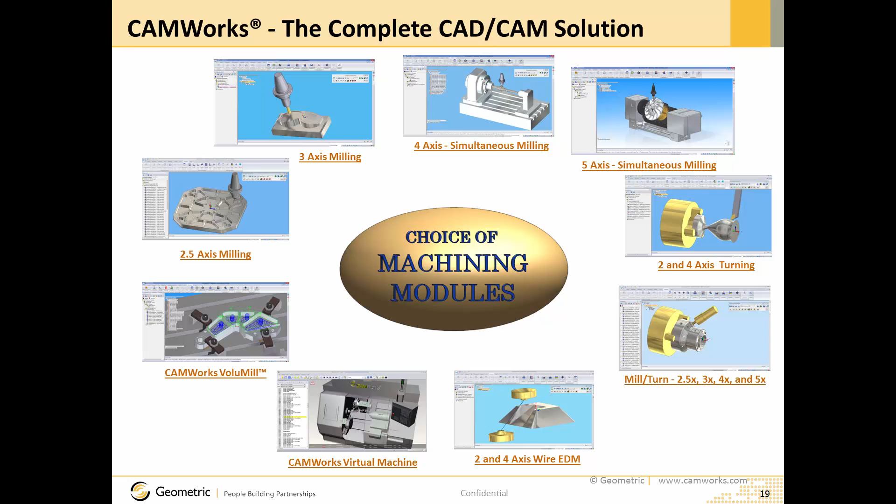And CamWorks supports a wide variety of CNC machines. A large post-processor library is available, and users can edit the post-processors using the Universal Post Generator, or UPG, which comes with every seat of CamWorks. And of course, we have literally thousands of customers all over the world.

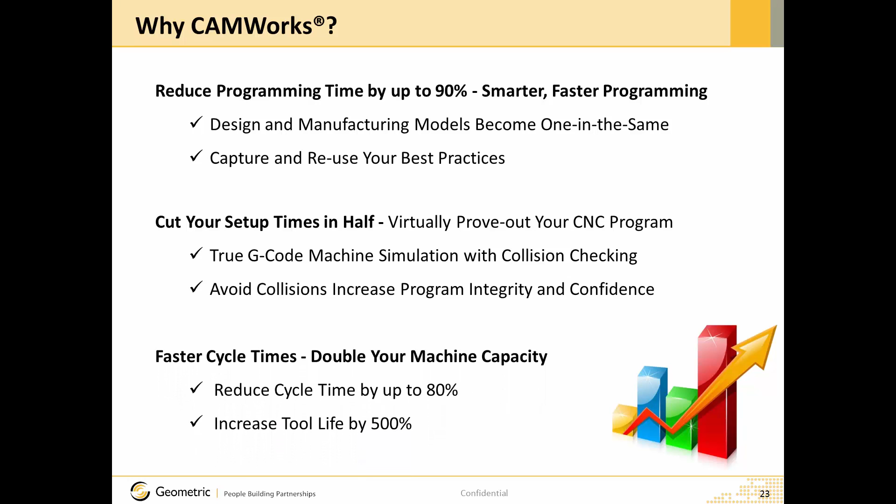So in conclusion, if you want to reduce your programming time by up to 90%, significantly reduce your setup time, increase production, and extend tool life, then you should consider CAMWorks for Solid Edge.